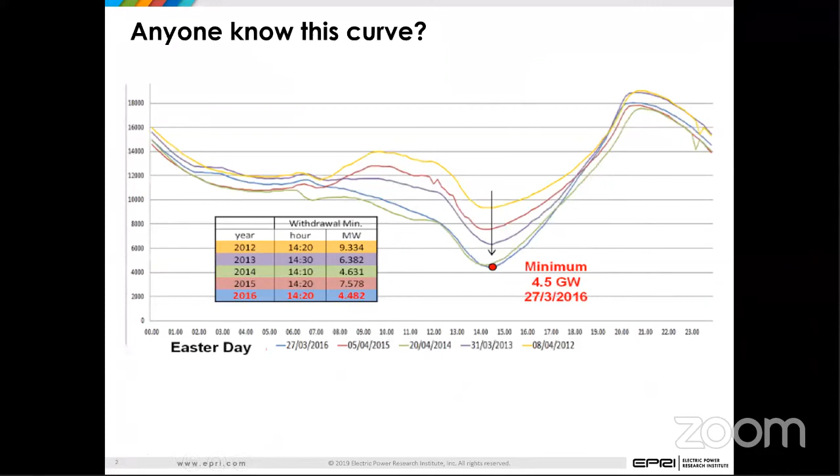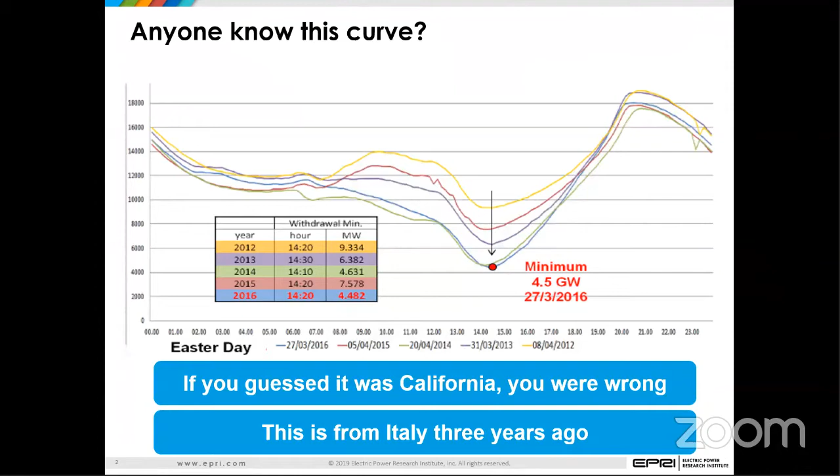So I just wanted to raise this question: has anybody seen this curve? It looks familiar, but it's not totally familiar. And the reason is, it looks like the famous duck curve that we talk about in California, but it turns out that this is a curve from Italy. The Italians actually ran into similar issues about 3, 4, 5 years ago, and it's getting deeper and deeper. So what we are facing today is not unique; a lot of different areas in the world are running into it right now. If you get to the next slide, just one second.

Sean, if you can hold on for one second, I'm just trying to join in. I understand. What we're seeing right now is your next slide where you've got the colored graphs on the left and blue graph. Right. Net load per one week.

Okay. So what that shows is two other grids. One is the ERCOT grid, and you can see what's happening in the ERCOT grid is that there's a lot of variation. This is a windy day, and with wind, you get a lot more variation than you get with solar. So on the same day, you could have over generation, under generation, and then huge swings in power production just within a 15-minute period. So what that means is that you need loads that can be changing quite fast. You also need other types of storage. Maybe it's battery storage. Maybe it's backup power. Whatever it is, you have to have a lot of different resources that vary really fast to be able to manage the grid.

And then on the right, what you see is a weekly load profile for a ZNE home in California. And what it shows is that the typical duck curve you see with these kinds of load profiles is not just limited to the bulk grid, it's even at the local grid level. So what this means is that there's various parts of the grid and the electrical system where you see these problems happening. And so as we grow clean generation, as we decarbonize, what we also need is flexible buildings. But with flexibility, what we really have to look into is when, where, and how. We are still trying to find out where that when, where, and how happens. If you go to the next slide.

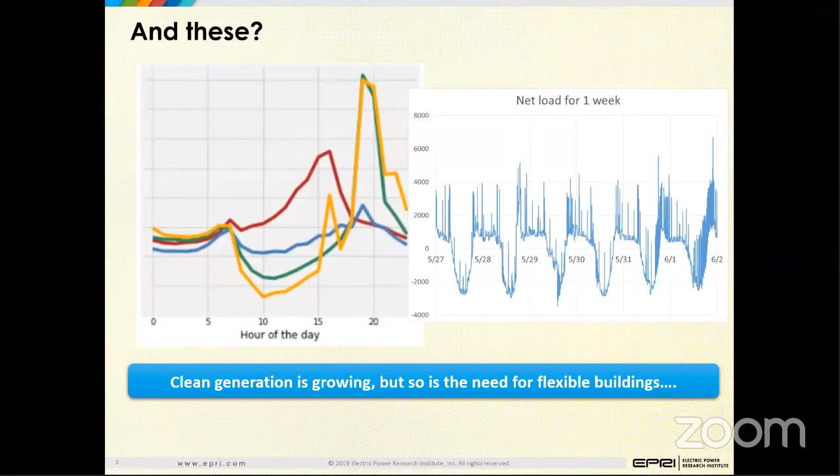So this next slide is essentially a quick synopsis of all the different areas where we need flexibility. When we talk about the goals that we have for renewables, when we talk about achieving carbon-free electricity, what we're talking about is the energy from the bulk grid. And that energy is over any period of time, usually annual or over some fixed period of time.

But what that doesn't tell you is what happens to the capacity in both the bulk grid and in the distribution system. And what that means is that as we get more renewables in the system, what you see with the duck curve, for example, is an issue with the bulk grid capacity. You have a lot of excess capacity during the middle of the day as you get more utility solar into the grid, and then you end up with these evening ramps and peaks.

Now, what happens with the distribution system is actually quite different in that the distribution system is essentially serving your loads, whether it's EVs, whether it's electrification of end loads, but it's serving your loads. And the challenge is that traditionally, when we have one-way power flows, the needs of the bulk grid in terms of energy, the capacity, and the distribution system have been well aligned. As we go to this new paradigm where we try to decarbonize both our buildings and our transportation, the three different areas start to diverge a little bit.

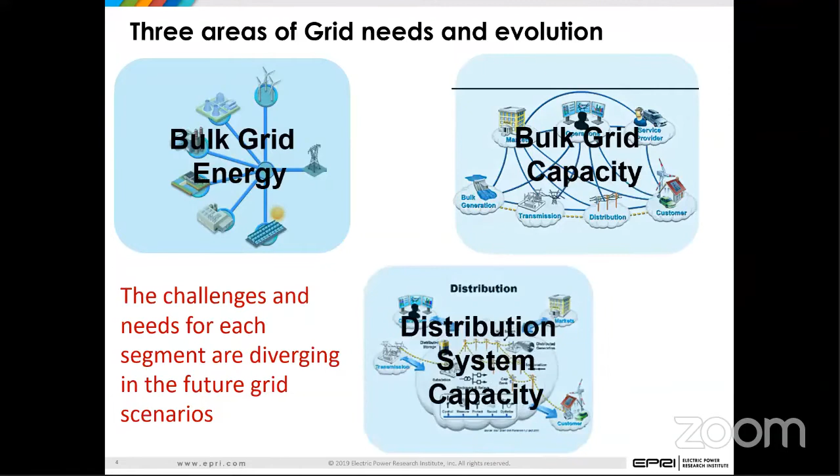And those three different areas, make sure I got them. Yes. Go ahead. Bulk grid energy, bulk grid capacity, and distribution system capacity. I don't think we'd forward those images. Okay. Sorry, continue on. Sorry, Ron. Okay, no problem.

So then you go to the next slide. We'll take a little bit of a walk down the woods into some of the projects and initiatives we have looked at in terms of building decarbonization. Next slide, please. This slide talks about a project that we completed a couple of years ago working with Southern California Edison, where we looked at what happens to the distribution grid when we start moving towards ZNE, right? So this work started in about 2013. 2020 was our ZNE goal.

We worked with a production home builder. We said, okay, hey, how cost effective is it to go to ZNE? And then what we wanted to look at was the impact, both in terms of flexible loads and what it takes in terms of distribution capacity. So we wanted to look at the impacts for ZNE communities. And what it turned out was that even about 5 years ago, we could get to ZNE new construction pretty easily. If you exclude the cost of the PV, the increase in home price was very, very minimal. And even with PV, it was less than 4%.

And this is for a production home builder, right? You're asking them to change a few things. We went and electrified the end loads, the heating loads, the heat pumps, and the heat pump water heaters. And then we also wanted to install connected loads for flexibility, batteries, connected heat pump water heaters, and connected thermostats, so that we could try to see how we can flex the loads.

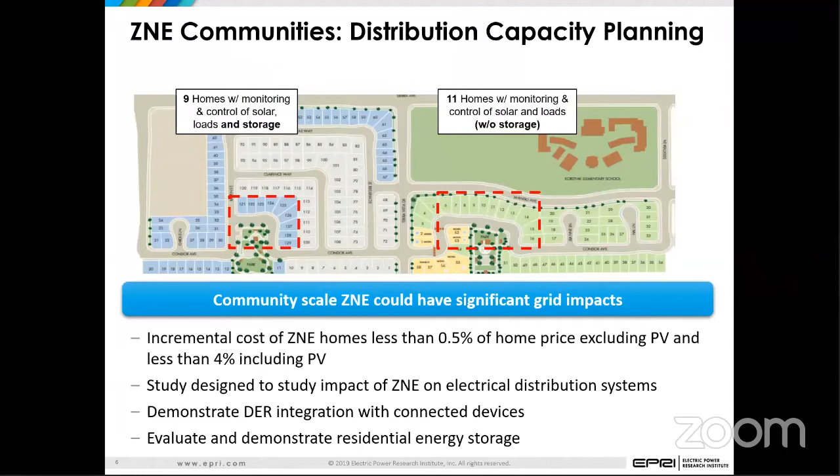And if you go to the next slide, what we learned was that the combined cost of electric heating systems was only about $200 greater than going to a gas heating system. The cost savings come from not running the gas lines inside the house, but a big cost savings in going to electrification in new construction was avoiding the venting. When you go to condensing tankless water heaters and high efficiency furnaces, the cost of avoided venting actually more than overcomes any additional cost for running 240 to the location where the water heater is.

And then on the heat pump side, your cost increment is actually pretty minimal. What we found was that it was more a supply chain issue in that most of the product providers or the distributors were charging a few $1,000s more for heat pumps. I can get a heat pump from Alabama much cheaper than I can get it in California today, possibly due to installers not being familiar with heat pumps. So it's more a supply chain issue than an actual equipment cost issue.

However, just recently we are working on some more communities now, and in one of the communities, the plumber is now asking for $6,000 more to install a heat pump water heater. It's a smaller builder.

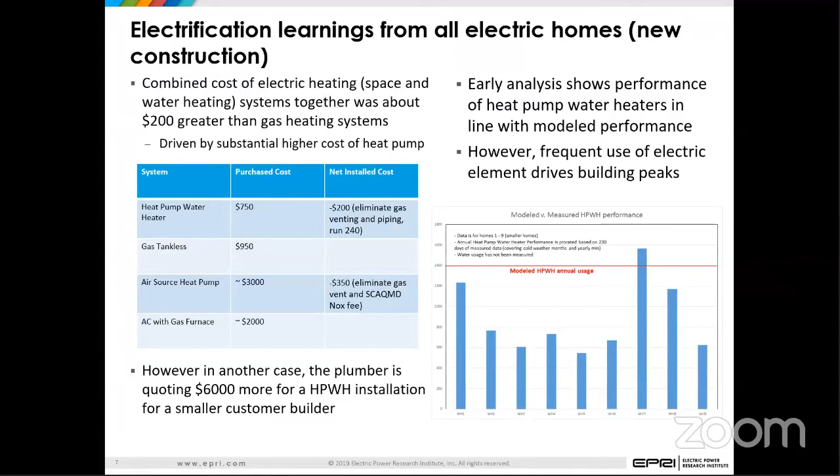And in terms of customer cost for new construction, as long as your envelope is really good, it's pretty much cost neutral. Again, I think it goes back to what Martha was talking about, that you have to get your envelope right before you go to electrification. Next slide, please.

So one of the big successes that we are working with right now is we've been able to work with at least one top 10 home builder to build a completely all-electric community without any gas lines. And we're probably going to have a grand opening for that community in a couple of months. So we are able to work with the builders. When you sit down with them, you show how the economics work, but it takes a lot of work. Then you can actually work on electrification of new construction.

Where we do run into some challenges is, of course, the cooking. And in the cooking area, I think it comes down to economics. If there is valid economics in substantially reducing the cost of running gas infrastructure, then the cooking can be electrified. Next slide, please.

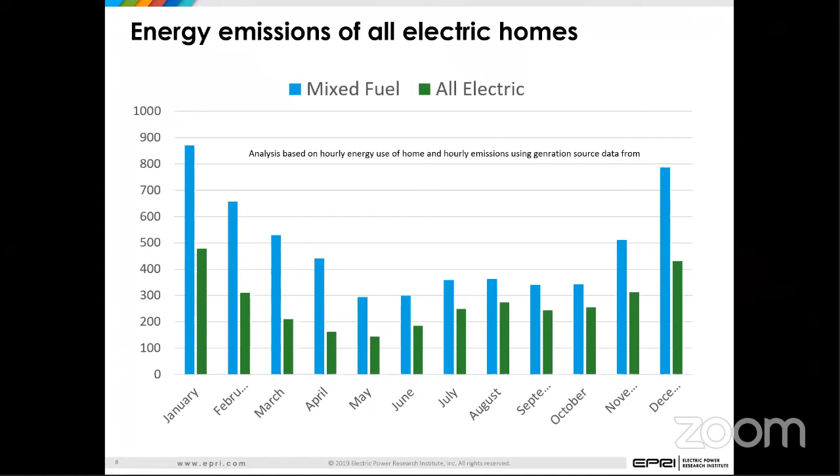Where we do see a big challenge is, of course, in existing homes. Some of the work we have done in existing homes shows that it's pretty expensive. You have customer cost issues with the current rates, you have infrastructure issues, you have unavailability of products. So there's a whole multitude of different issues that we see.

For example, with heat pump water heaters, what we find is that a lot of the existing products in the market don't fit into existing locations. You don't have 240-volt power in a lot of cases. In many homes, the panel capacity is not big enough for us to electrify heating systems. And of course, if you have to go to heat pumps and you have to put in backup electric resistance, then you probably don't have enough capacity.

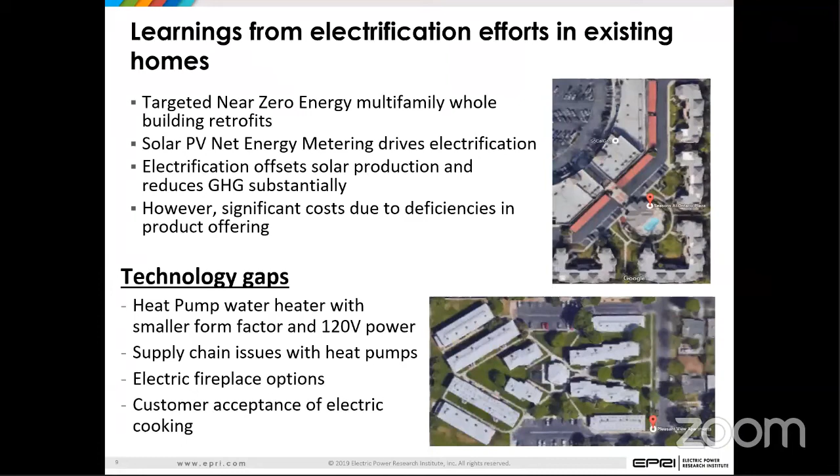One silver lining is that we think that in areas where air conditioning is prevalent, switching over to heat pumps takes out a lot of the carbon content in existing homes, and that could be a low-hanging fruit to go after. Next slide, please. So this is just some examples of what we see consistently.

So it goes back to the theme of infrastructure. A lot of the homes have existing panels that are 60 amp, 100 amp, 125 amp panels, especially in multifamily housing. And there is just not enough capacity for us to electrify the heating system. So we are actively looking for technologies that can help us avoid these upgrades of the existing systems.

The challenge is that if you have to upgrade the panel, then you have to upgrade the conductor. You have to upgrade the panel at the overall building level if it's an apartment. Then if the panel goes up in size at the building level, now you have to replace the conductors on the distribution side, on the secondary side of the transformer. And if you do enough of that, now you have to upgrade the transformer. The costs just keep building up as you go step by step.

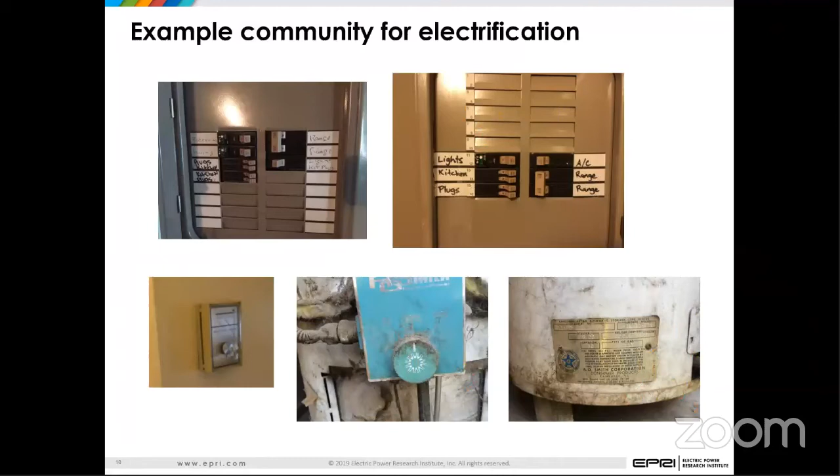Next slide, please. So what the next slide shows is kind of an estimate of cost, in terms of making the changes from existing water heating to electrification of water heating. One of the things that we find is that taking existing electric resistance water heaters and converting them to heat pump water heaters actually has a greater carbon savings than trying to convert gas tankless to heat pump water heaters.

So from a beachhead perspective, from getting the market going, from getting the plumbers and the installers going, that might be a great target to start with. And then, of course, at any point when you have to do a service upgrade or a grid upgrade, the costs just add up. Next slide, please.

Oh, Anne was wondering what you meant by the market split on this slide. The second column says market split, and it's like number 0.5. What does that mean? Yes. So in terms of that slide, it's an estimate of how much we think we can actually turn over.

So when we say the market split, it is about the availability of 240 at the location of the water heater to be able to convert from fossil fuel over to electric. For example, we estimate that where houses are running on propane, there's probably a little bit more capacity available, whereas many of the houses running on natural gas might be really constrained on capacity. That's just an estimate: we think that 80% of homes with natural gas are going to have trouble with conversion of water heaters. Thank you. Yep.

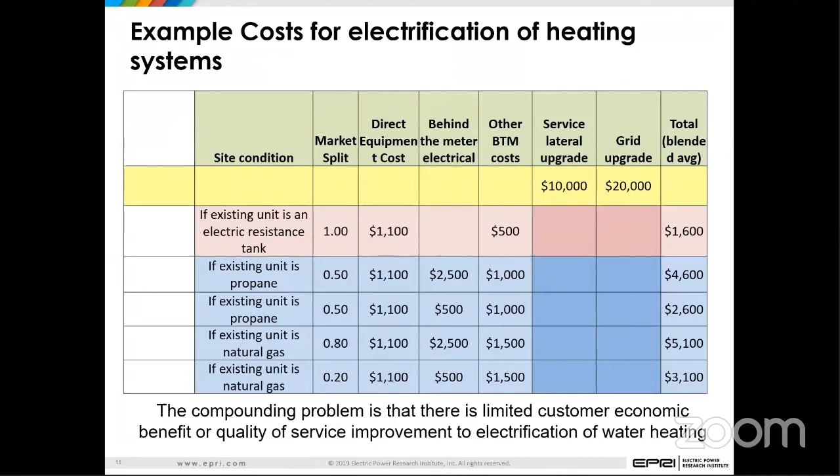If you go to the next slide, this is what we call the cost stack in building retrofits, where the equipment cost is just the tip of the iceberg. If you just have to replace equipment, it's pretty cheap. If you have to upgrade the panel in the building, it's expensive, but not too bad. Once you start running additional 240 wiring, and then if at some point you just don't have enough distribution system capacity, that's when the cost really starts adding up. The estimate is that if you really have to upgrade distribution, you're looking at about $20,000 to $25,000 per home for a full electrification retrofit.

So if you're going after decarbonization, I think what we really have to look at is the overall system cost and try to understand where the low-hanging fruit might be for decarbonization.

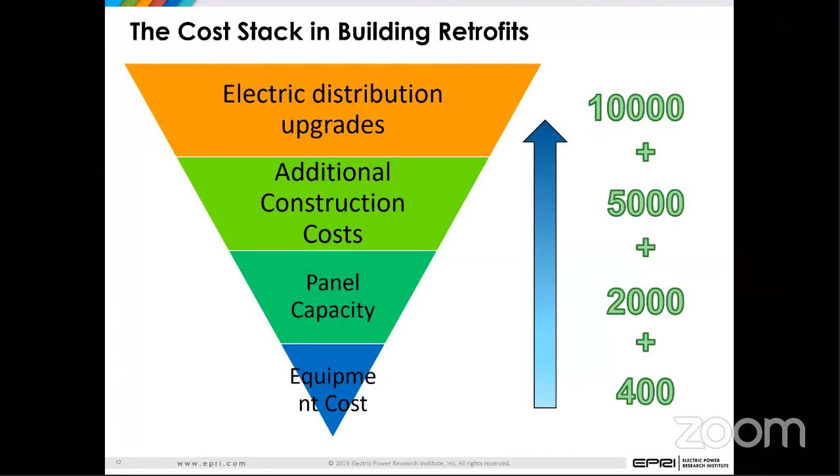Next slide, please. So going through the experiences around electrification of existing buildings and new construction, we realize that the big wild card here is the grid, and the EVs have already gone through that cycle. That's why we have a huge $750 million program for EV charging infrastructure, because they have the same issues. The building side is actually following the EV side maybe 10 years behind, but we are running into the same issues with what we call the grid edge distribution system. Next slide, please.

So when you think about distribution systems, there's two things: there's operations and there's planning. When we talk about controls, usually we talk about operations, and operations is for existing distribution systems that are already there. When you are trying to understand what you have to do on the hardware, which is the transformer size and the conductor size, you're in planning mode. And planning usually is a function of the connected load, not a function of the controls or how the flows work on a real-time basis. And the reason is pretty simple.

Today we can change your battery controls over the air almost instantaneously. If your battery control suddenly stops working and flips the battery from delivering energy back to the grid to pulling energy, suddenly you're switching from being a generator to a load. When you're doing planning, you're planning a 50-year asset, and you cannot depend on things like over-the-air control algorithms to plan a 50-year asset. So when we plan these assets, it's always planned based on how much load is connected.

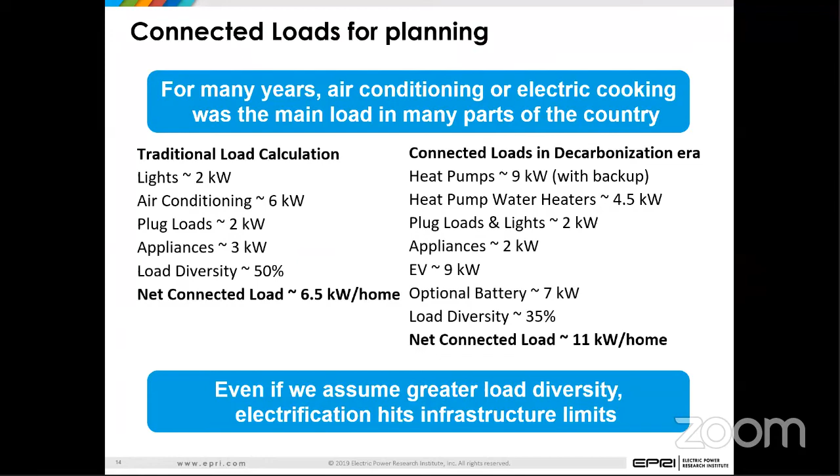And then those seem to be peaking, let's say 8 p.m., 9 p.m., when people come back and all the loads are starting up. If you plug in your EV at the same time, now suddenly you have some huge load peaks that you have to address. And so that's the discussion that we have to have moving forward. How are we going to adapt our distribution system so that we can actually electrify and decarbonize our building stock? Next slide, please. Ram, 5-minute warning.

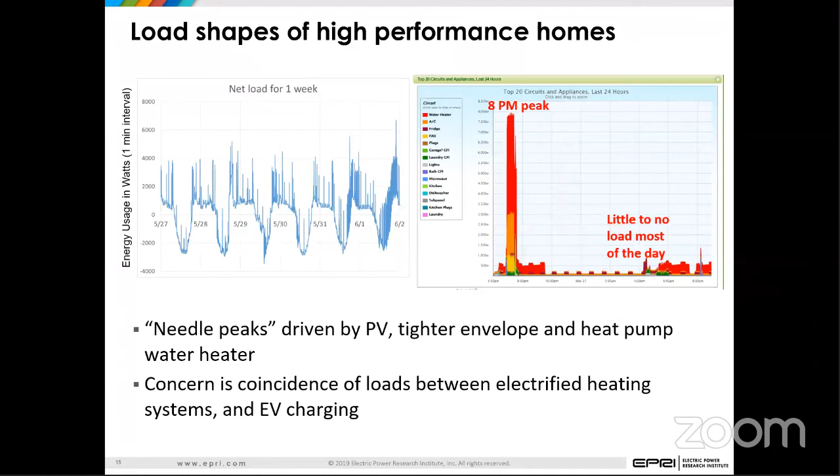Yes. I wanted to interject that there's also the possibility of limiting the power requirements of equipment versus upgrading the grid. That's at least maybe part of the solution, going to the equipment and saying you just can't use 30 amps. If you're a water heater, you can only use 5 or 10. How does that enter your thinking? Absolutely. I think that's part of the solution here too. So we have to look at it both ways. And again, that's the product gap I referred to in an earlier slide.

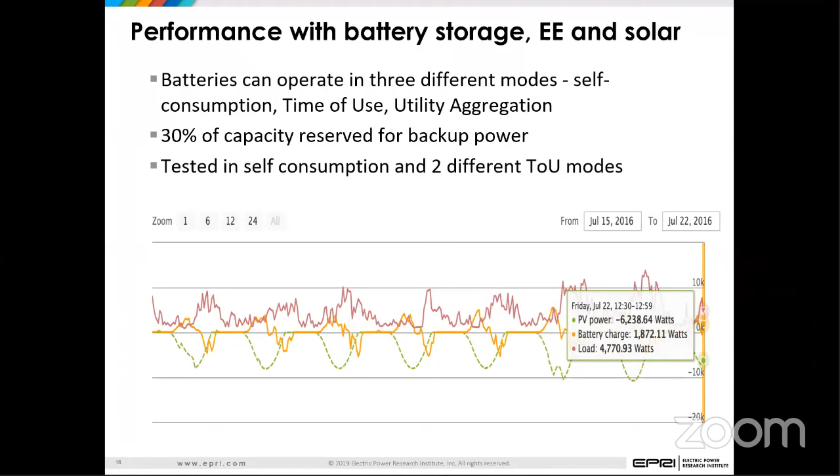So Sean, given that we have 4 minutes, let me try to quickly run through, and then maybe we'll have a couple of minutes for questions. But you're absolutely right. That's the other thing that we have to work on. So I'll skip through. The next 2 or 3 slides just talk about what happens on the distribution planning side. We actually ran some analysis on distribution system sizing, if you go to the slide with the two sets of graphs.

What it shows is that if you operate your battery based on TOU rates, it actually makes the feeder worse. It really increases the loading on the feeder, versus if you operate the battery to soak up excess energy, that is, run it in self-consumption mode. But today, most of the batteries, especially on the residential side, are designed to run on TOU. And when you run it on TOU, it's essentially running wild. A lot of times the charging peaks might coincide with your load peaks, which means you might end up stressing the distribution system a lot more versus running it in self-consumption mode.

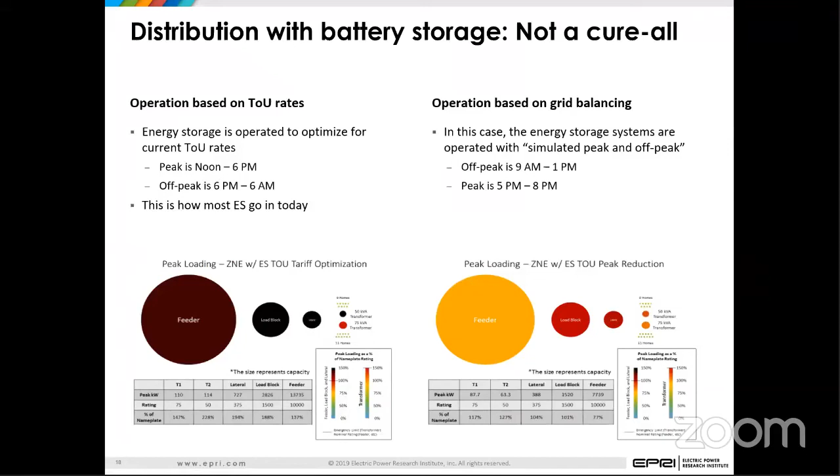So part of it is we really have to think about, as we start deploying more batteries, how do we charge these batteries? What is the optimal way of running these batteries? Next slide, please. So one more slide.

So part of this is that when we talk about storage, as we look at the evolution of the grid, there are multiple forms of storage. There's batteries, but there's also water heaters, there's ice storage, there's storage in high mass walls. And we have to look at all those types of storage too in the future evolution of the grid.

Next slide, please. So part of, I think, where we need to look at from a building's perspective is how are we going to make buildings and building controls work in a coherent manner between different types of energy storage so that we can do balancing at the distribution system level, at the local level, right? If you're able to charge more, what do you actually charge? Do you charge your building envelope?

Do you charge your water heater? Do you charge your batteries? When do you charge each of these? And how do you actually balance all these out? How do you control all of them? I think it's going to play a key role as we move towards the future of the grid, as we try to transform the grid.

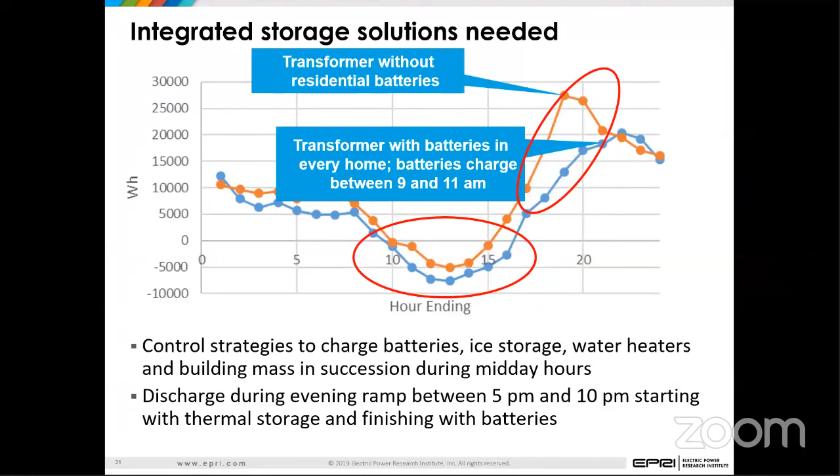Next slide, please. This is an example of using water heaters as storage. One of the things we noticed with heat pump water heaters, of course, is that if they run correctly, the capacity response of heat pump water heaters is only about 200 to 400 watts. So at aggregate, we might still get some decent capacity, but individually, they're all pretty small. And that's the way we want it to be.

If your heat pump water heaters run efficiently, and Sean, to your point, if we reduce the power draw of those, they just don't have that much capacity or capability to move load, right? But that's a good thing. That's what we want with electrification.

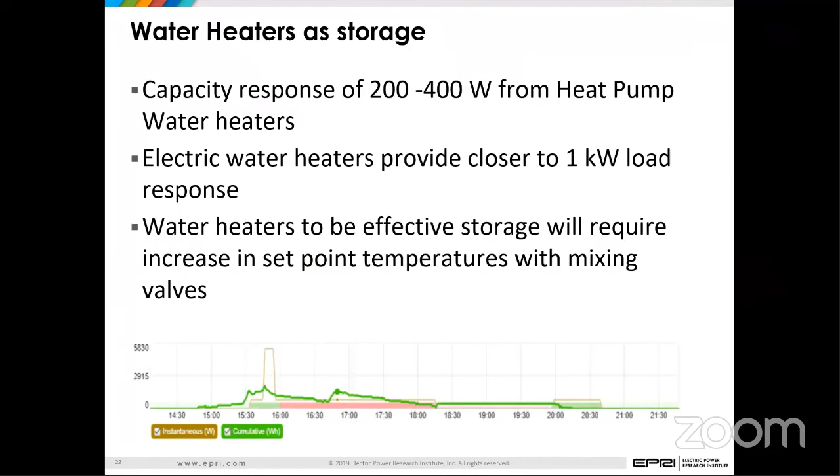Next slide, please. Same thing with smart thermostats, right? If you run smart thermostats, if you do pre-cooling, what we find is that they have some significant storage capacity. And in aggregate, they can be used to manage, modulate, and balance the distribution systems, as well as provide services back to the ISO. Last slide, next one.

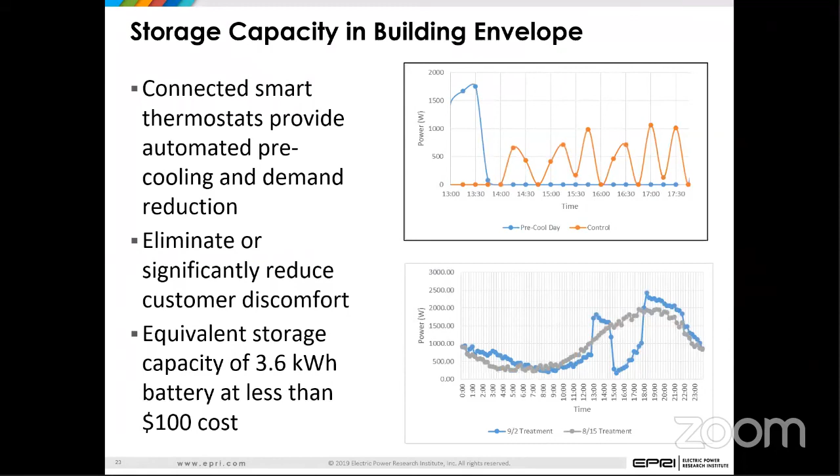So what do we see as the future, right? The future is that, hey, we have to look at distribution planning. How are we going to do our distribution planning differently for electrification, decarbonization? But then we also want to look at, as we get more connected loads, whether it's EVs, whether it's commercial buildings, whether it's residential buildings, how are we going to get these controls so that we can do better aggregation

and better what we call orchestration, which is you provide customer benefit through orchestration so that you reduce your customer cost through time of use rates, and then do the aggregation so that you can provide not just services back to the ISO, but also services back to the distribution side of the grid, which is where I think the action is going to shift as we go to the future where we drive decarbonization, where we drive greater penetration of electrification of end uses.